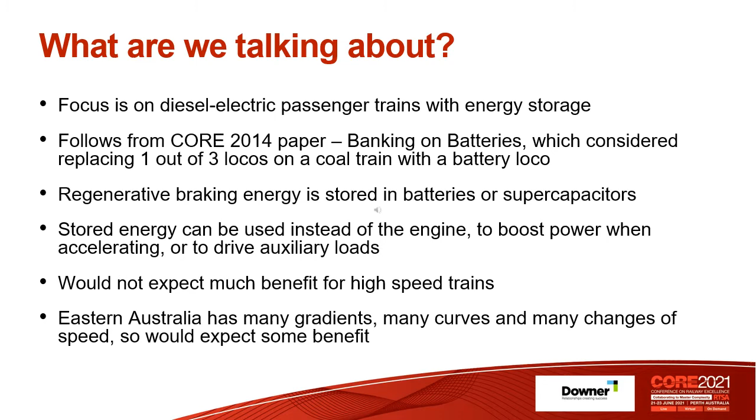But in Eastern Australia, trains do not run at constant high speed as there are many gradients, many curves, and many changes of speed. So you might expect some benefit. The question is, how much? Hybrids have become quite common in road vehicles since the introduction of the Toyota Prius some 20 years ago. But have they missed the train? So far, there are not many in rail applications.

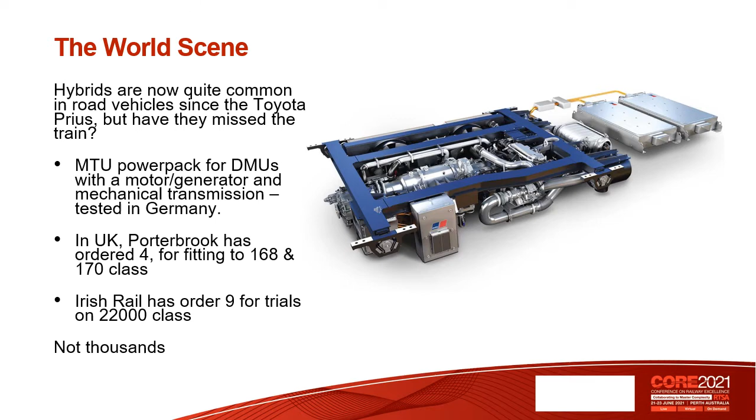MTU makes a power pack for DMUs with a motor generator and mechanical transmission. This was tested for a few years in Germany. In the UK, Porterbrook has ordered 4 for fitting to the 168 and 170 class, and Irish Rail has ordered 9 for trials on the 22,000 class. But these are small numbers.

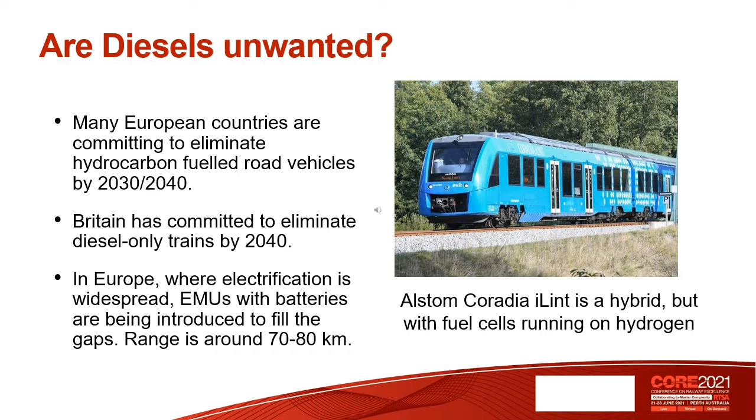Many European countries are committing to eliminate hydrocarbon-fueled road vehicles in the next decade or so, and Britain has committed to eliminate diesel-only trains by 2040. There is a general move away from diesel. In Europe, where electrification is widespread, EMUs with batteries are being introduced to fill gaps where DMUs currently operate. Ranges around 70 to 80 kilometres. For longer distances, they're looking to hydrogen, which powers the Alstom Coradia iLint, for instance. It is a hybrid, but with fuel cells, not a diesel engine. So overseas, there is not a lot of interest.

So would there be any benefit using hybrid technology in Australia? To find out, I did simulations for a train of similar capacity and performance to the ageing XPTs, which operate out of Sydney, comparing fuel consumption for a diesel-only version and a diesel hybrid with energy storage. Both trains have the same configuration of 1 power car and 5 trailers, but of course the one with energy storage would be heavier. I compared different types of routes, including high-speed long distance, hilly terrain with curves, and regional with many stops, to see how much fuel the hybrid saves.

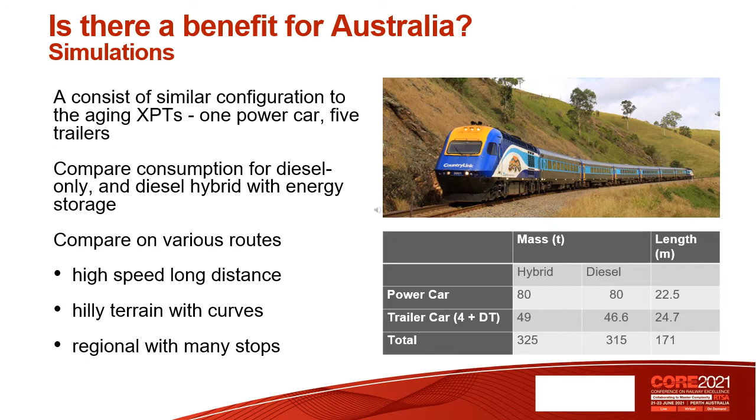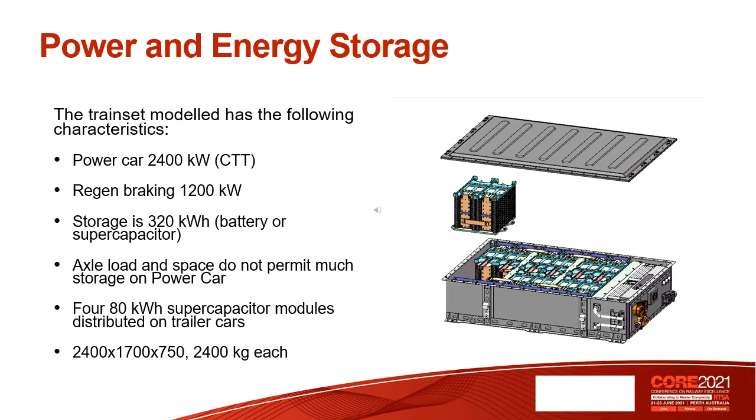In practice, a smaller train would be used on some of these routes, but to aid comparison, I used the same configuration for all. The train set modelled has the following characteristics. The power car is loosely based on the Cairns tilt train power car with 2,400 kilowatts of engine power. Regenerative braking is 1,200 kilowatts, and storage is 320 kilowatt hours as supercapacitors, and this adds about 10 tonnes of weight to the train. As axle load and space do not permit much storage on the power car, the 4 80 kilowatt hour supercapacitor modules are distributed on the trailer cars.

To give a fair comparison, a similar strategy was used in driving both sets. So don't go faster than necessary to meet timetable. Air drag increases with the square of speed, and at 160 km per hour, air drag is 80% of the total resistance. Braking later and harder allows higher average speed with little fuel penalty, but on the other hand, for the hybrid, you aim to minimise friction braking to recover maximum energy.

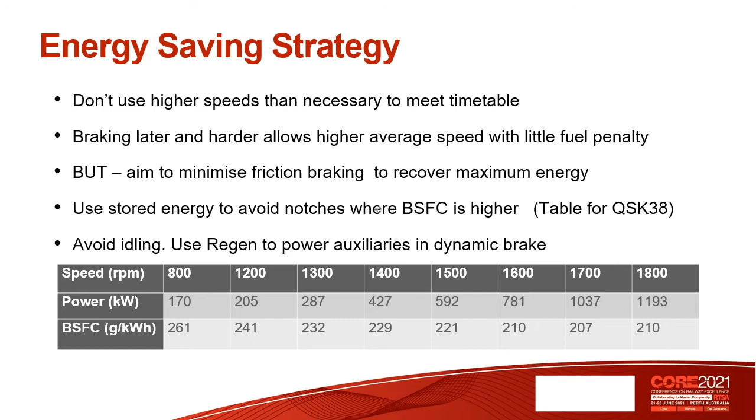You should use stored energy to avoid notches where brake-specific fuel consumption is higher. The table below is for a Cummins QSK38, and MTU and Caterpillar engines show similar patterns, where the highest efficiency is above 1500 RPM, and it's significantly lower at part loads. At 800 RPM, it's 25% higher than at 1700 RPM. And you should avoid idling and use regen to power auxiliaries in dynamic brake.

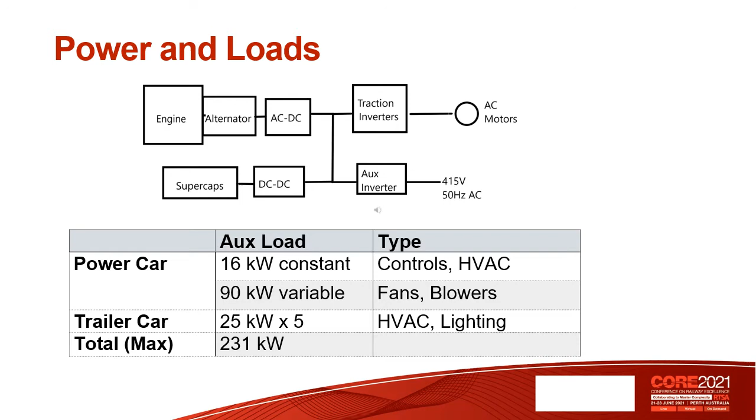The first set of routes considered are in the eastern states, with the three routes currently served by the XPTs, Sydney to Brisbane, to Dubbo and Melbourne respectively. The interstate routes are nearly 1,000 kilometres. Dubbo involves crossing the Blue Mountains with many steep grades and tight curves. In addition are Sydney to Armidale and Canberra, which are currently served by DMU sets. And just for interest, I included the Overland from Melbourne to Adelaide.

As some of you are in Western Australia, and I thought I would be too, I included Perth to Kalgoorlie, served by the Prospector, and the Australind, which runs from Perth to Bunbury. The Prospector route in particular is very flat compared to the East Coast.

The savings are higher on the regional routes, where the outward leg is uphill. For Canberra, the round trip saving is over 24% and 26% for Armidale. The return leg savings are 30% or more, but Melbourne to Adelaide is a moderate 17% saving.

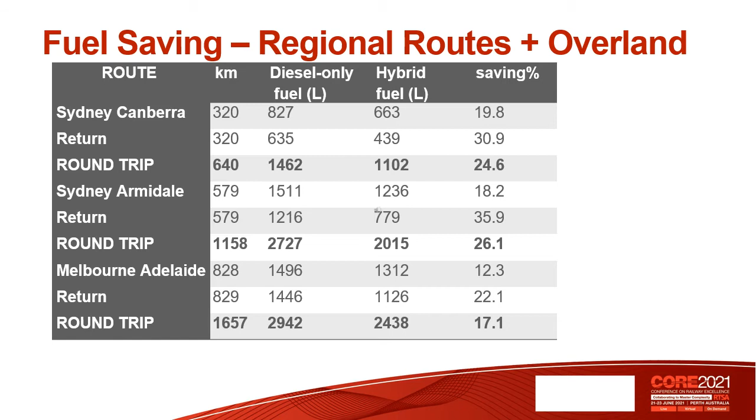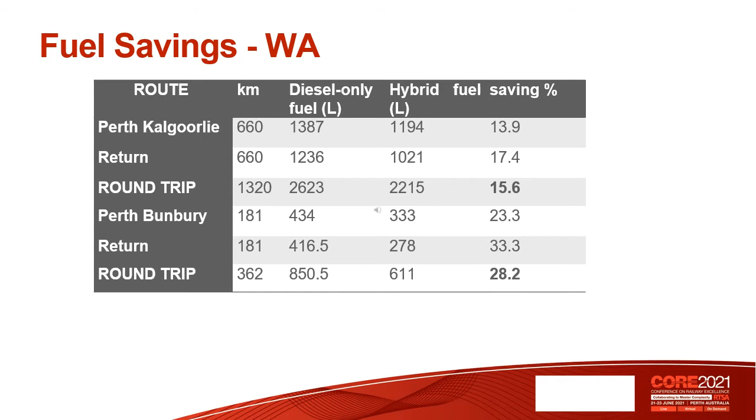In Western Australia, the Kalgoorlie trip gives a saving of only 15.6%, which might be expected for a flat, high-speed route. Interestingly, the saving for Bunbury is very high at 28%. It is the shortest route with a lot of stops.

It is interesting to correlate the state of charge over the trip with the fuel savings. These graphs compare the level of stored energy for a run from Canberra to Sydney and Brisbane to Sydney. The purple line is altitude. Clearly, Canberra to Sydney is predominantly downhill, while Brisbane and Sydney are at the same level, with mostly smaller grades in between. For Canberra to Sydney, the blue line representing stored energy is increasing, but from Brisbane, it never gets to charge up.

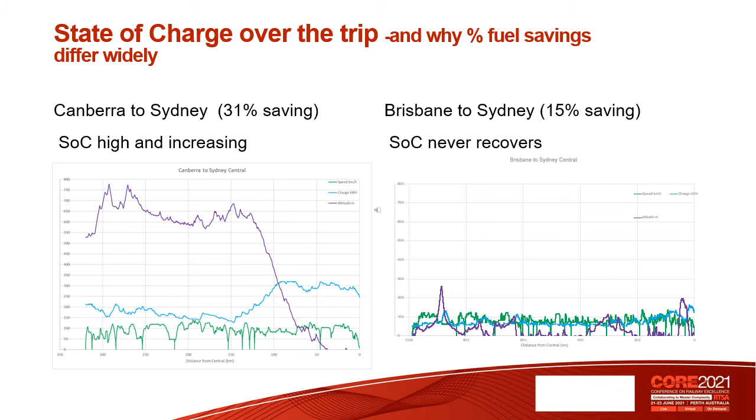This table presents the duty cycle for the same two runs, with the bold columns giving the percentage of time in each power notch. For Canberra to Sydney, the zeros for idle up to notch 3 indicate the engine does not run, with power drawn from storage, and even in notch 5, runtime is greatly reduced. The higher notches use much the same fuel in both cases. Overall, the saving is 31%. For Brisbane to Sydney, idling is greatly reduced, and there is some reduction in notches 1 and 2, leading to a much smaller saving of only 15%.

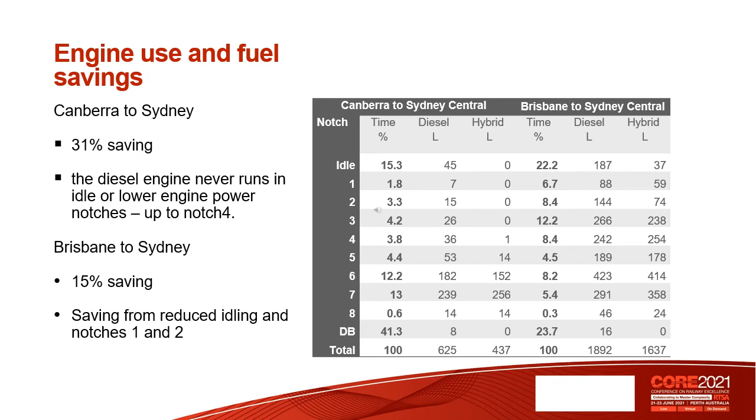It is interesting to look at the influence of timetable. Currently, the timetable for Sydney to Brisbane has a lot of slack. The trip takes nearly 13 hours in each direction, and by judiciously increasing the speed in a few sections, travel time could easily be cut by half an hour in each direction. There would of course be a fuel penalty, but this penalty is much smaller for the hybrid than for the diesel, 46 versus 145 litres. Increasing speed on this tortuous winding route requires more braking, with the potential for more energy recovery. On a flat route with few speed changes, we would not expect much difference in the fuel penalty between diesel and hybrid.

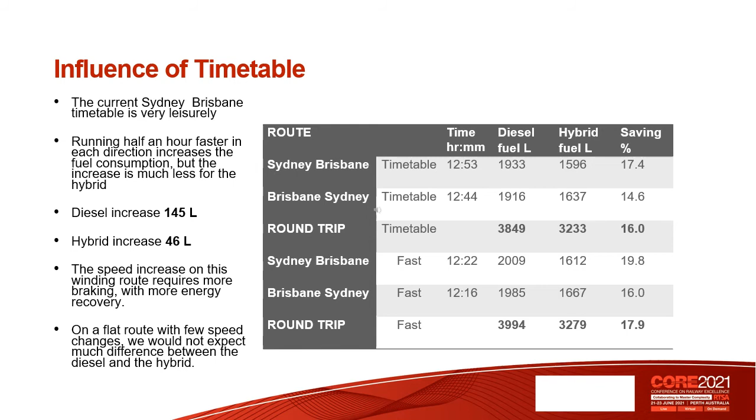So more braking can mean more fuel saving, and in fact, dynamic brake energy is a predictor of the fuel saving. Here the routes are tabulated in order of increased fuel saving. It can be seen the total dynamic brake energy divided by distance, the second last column, is also increasing. In the last column, the relationship between dynamic brake energy and fuel saved is almost all in the range of 5 to 5.5 kilowatt hours per litre. Dubbo is the outlier, possibly because the storage reaches capacity descending the Blue Mountains and some of the energy is lost. But the conclusion is that for any particular route, if you can measure how much energy is dissipated in dynamic braking, you can save a litre of diesel fuel for every 5 kilowatt hours.

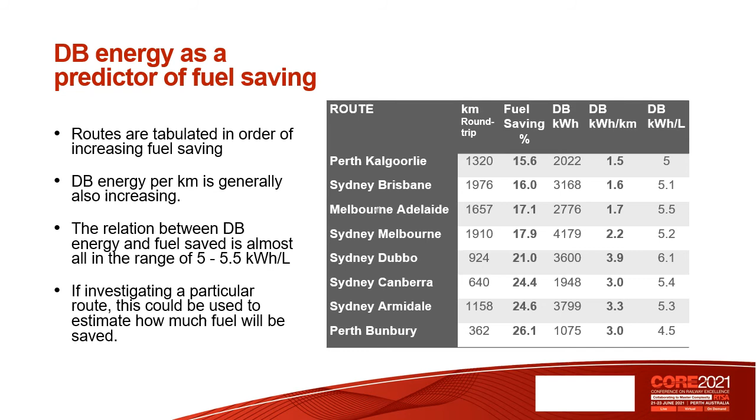For supercapacitors, the cost to fit the train is about $3.9 million, so it will take nearly 8 years to pay back the capital cost. But you will get perhaps 15 years of life from the supercapacitors, so in the long term, it is a good investment. Using NMC lithium ion is much cheaper. It will cost less than $1 million to equip 3 train sets, and payback will be less than 2 years. But the high charging current during dynamic braking will lead to short life, and you might need to replace the batteries in 3 to 4 years.

LTO batteries are in the middle. Cost is about $1.8 million to equip 3 trains. The payback is about 4 years, and they are much more suited to high charge and discharge current. They will last perhaps 10 years, so they are probably the best option. Note that the benefits on regional routes where fuel savings are 25% or more will be greater. For routes like Sydney to Brisbane or Perth to Kalgoorlie, where the savings are only about 15%, the payback will take a lot longer.